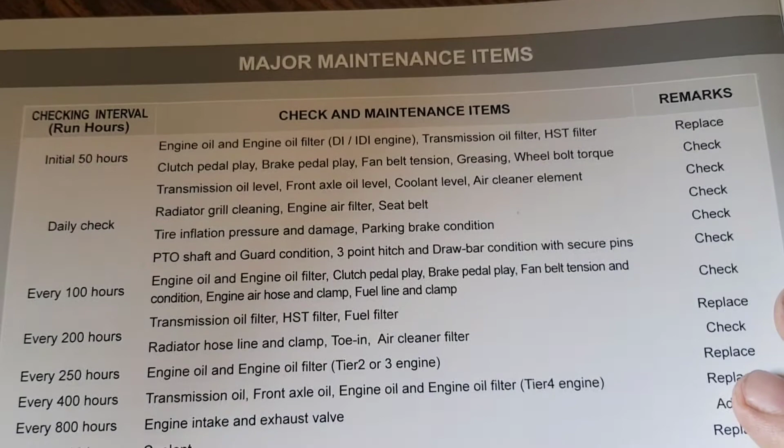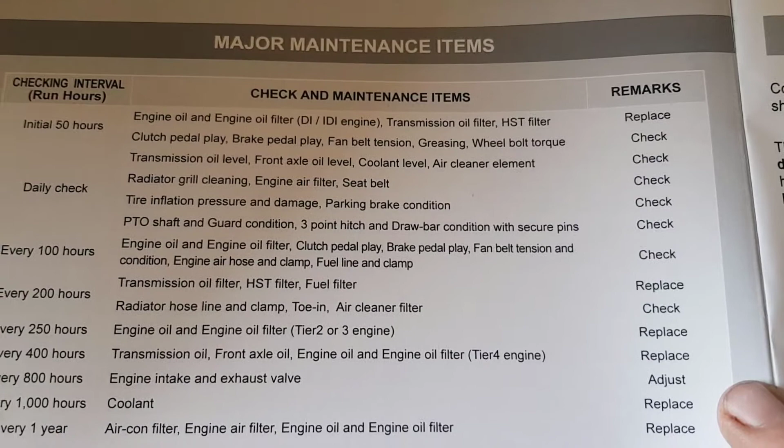Right here on the first page of the manual, it shows the 50-hour service. It says to replace that top line, which includes the engine oil filter, transmission oil filter, and hydrostat filter. The rest is just inspection and checking.

So I'm going to jump to page 2-3. It talks about fluids and grease points, and right here shows what you can use for oil. I'm going to go ahead and use the 15W40.

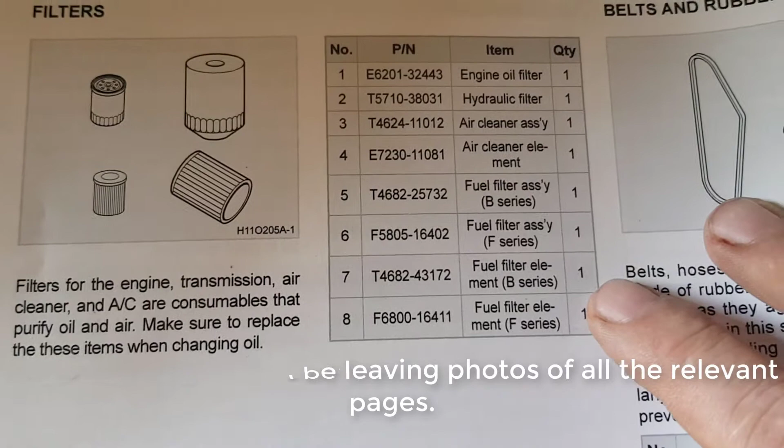I had some issues here with the filters, so I wanted to talk about it. Some of them I couldn't find, so I went ahead and ordered a kit. I'll put the link down in the description - I got it on Amazon.

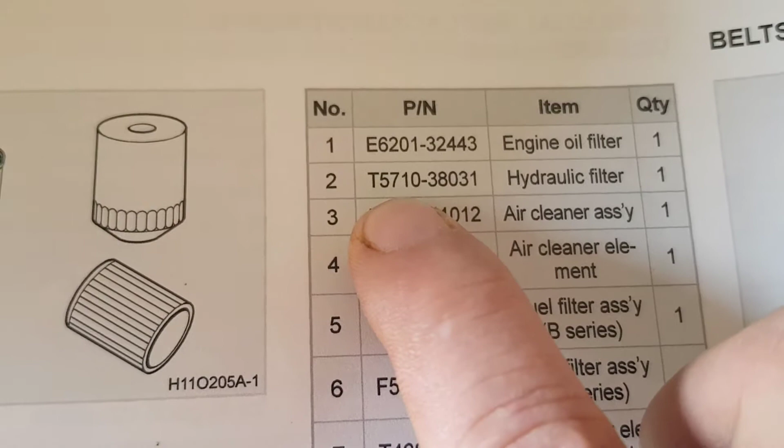Right here's the oil filter - that number lined up, didn't have any issues finding that. But when I got to the hydraulic filter, this is the number shown here, and it's the only number I could find online for this tractor. So I'm hoping this is going to be it. In the book, this is the number it shows, so it's quite a bit off - the first set of digits are wrong, but the second set is correct.

And then for the hydrostat, it doesn't even show a set of numbers here for it. So I'm just hoping that this is the right one.

I'm not going to change the air filter, but I am going to check it and blow it out with the air hose. I probably won't change that yet, but I'll have it on hand since it came with the kit. And that's the oil I'm going to be putting in, 15W40.

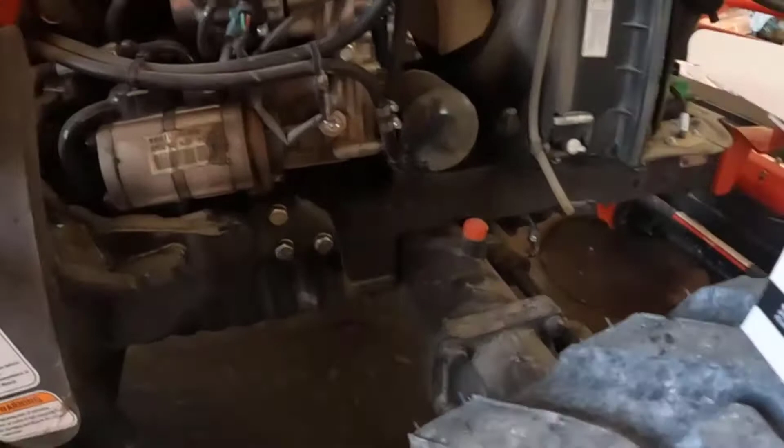So let's get in there. I'm going to start with changing the oil and the oil filter first. I'll push this up under here. Looks like the drain plugs are right here - on this one there's two, so I'll be removing both of those.

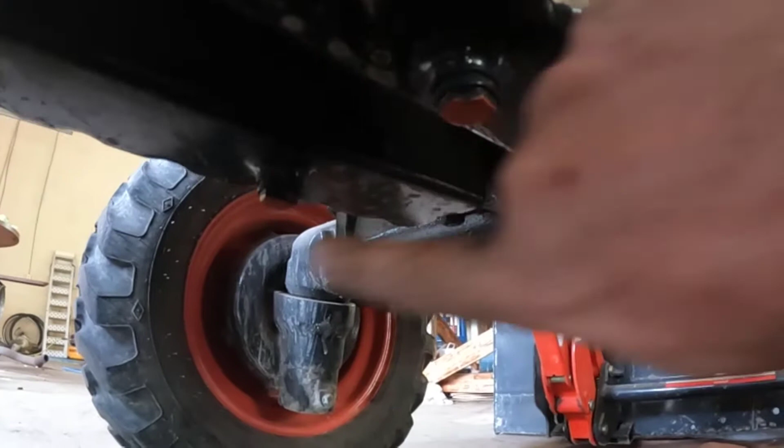Let's set you down over here. That one's loose, go ahead and loosen this one up too. That was really tight - I got that broke loose as well. I need to loosen that cap on the drain so it'll flow down in there.

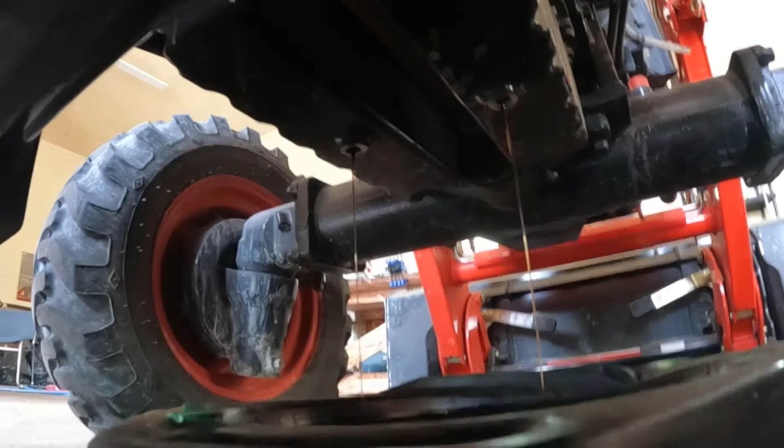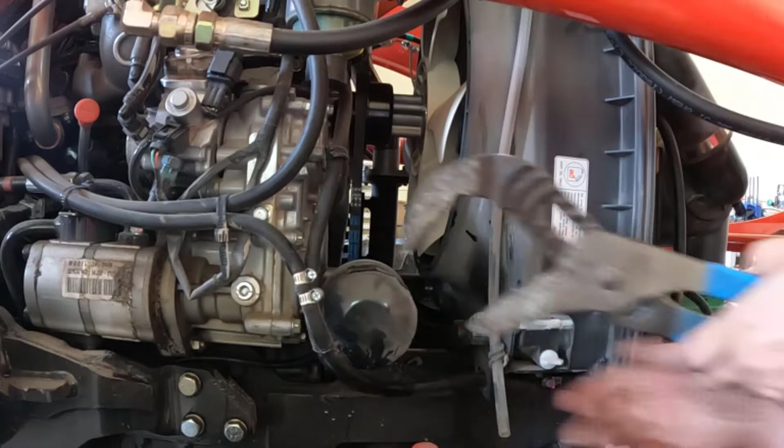I'm going to be using some large pliers to get in here and turn it. They're on there pretty tight, but the good thing is that they're old and coming off anyway, so it doesn't matter if you damage them by squeezing them or anything like that to get these things off.

I'm going to move that pan over. I don't think anything's going to come out of this one since I already have it drained. Spin it off - all right, maybe a little bit will. Spin that off of there and put that in my pan.

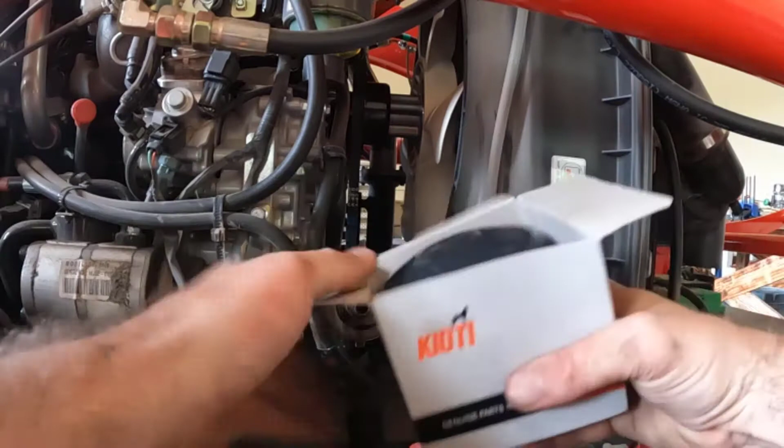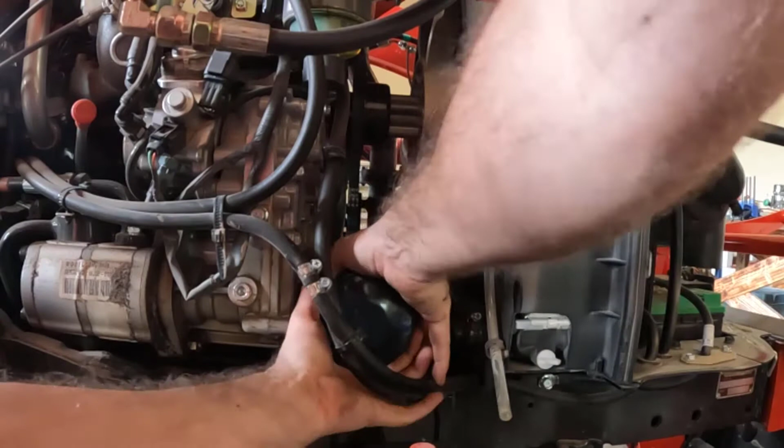Now I'm going to go ahead and remove this filter. It does have a plastic film there. You take a little bit of oil on your hand, rub it on that seal, and put that filter back on there, getting it nice and hand tight. Alright, it's good to go.

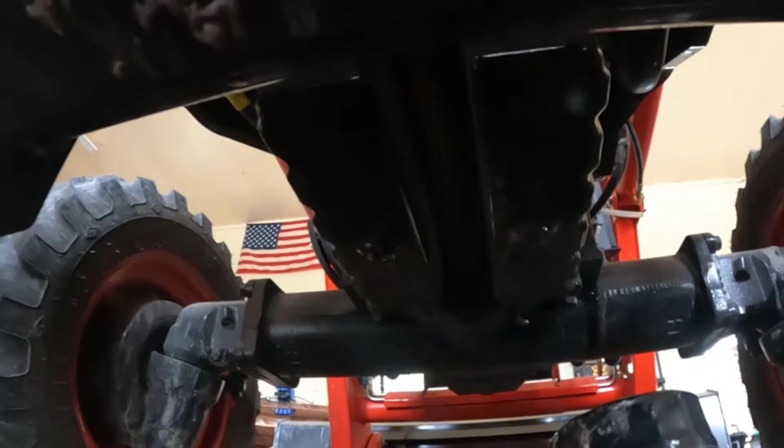I've got to put those drain plugs back in there. See, it's pretty much come to a complete stop for dripping oil. So I'm going to go ahead and insert those back in.

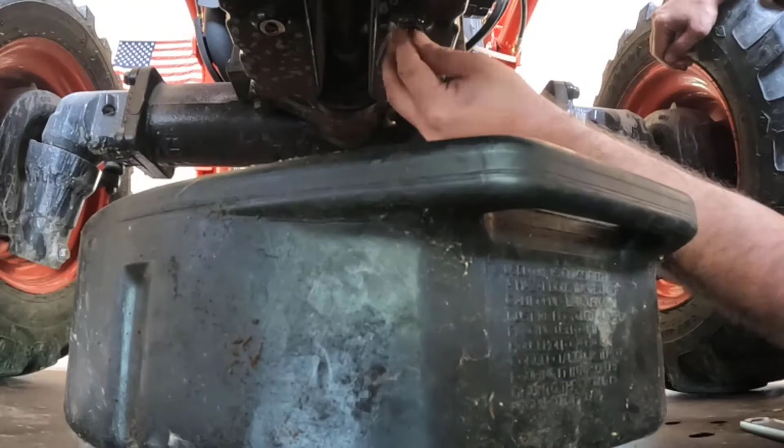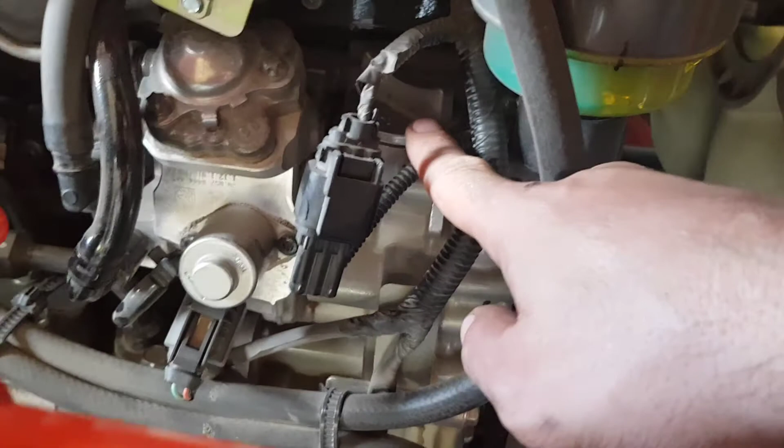Right here is the cap to put the oil in. It's kind of hidden in there - if you don't know what you're looking for, you might not see it because it's the same color, but it has a little oil symbol right there on top.

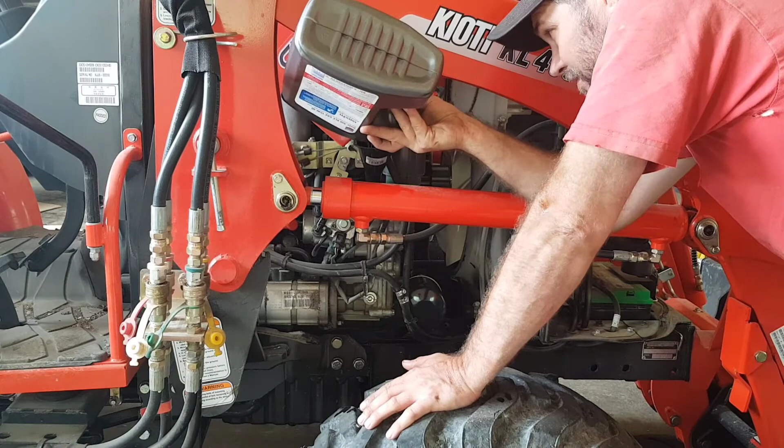Guys, I have a weenie dog down here pestering me. I think he's bored or something. He's pestering me.

On the dipstick, there's this little notch - this is the low end, so never start it if it's under that, and this is the high end over here, so don't start it if it's over that. If you go under, you need to put more in. It says it's good anywhere between here, but I'm guessing most people are getting up in this area, so that's where I'm going to fill it up to. Otherwise it's good after one.

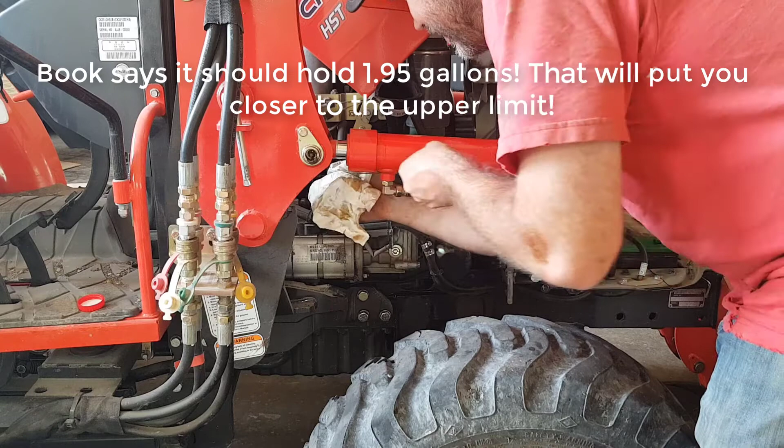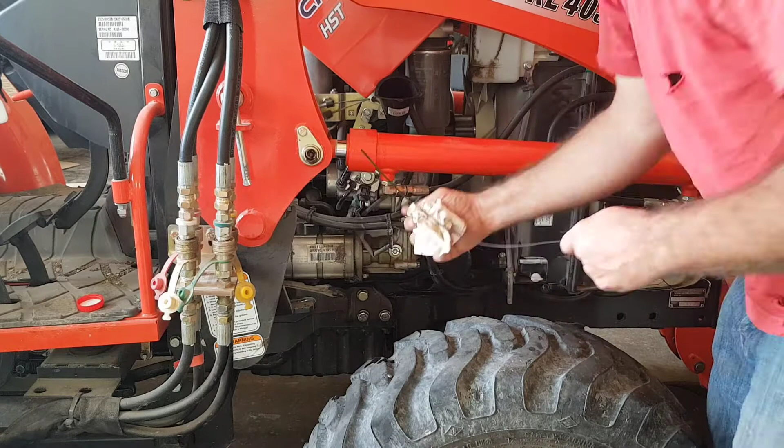Right? So I don't really get that - they don't actually say where you should be. But I'm already getting up to the upper limit, I think it's actually probably good there. I don't know, I might put a little bit more in it. I'll check it after I start it because it might suck some of that up into the engine, so I'll leave it there for now.

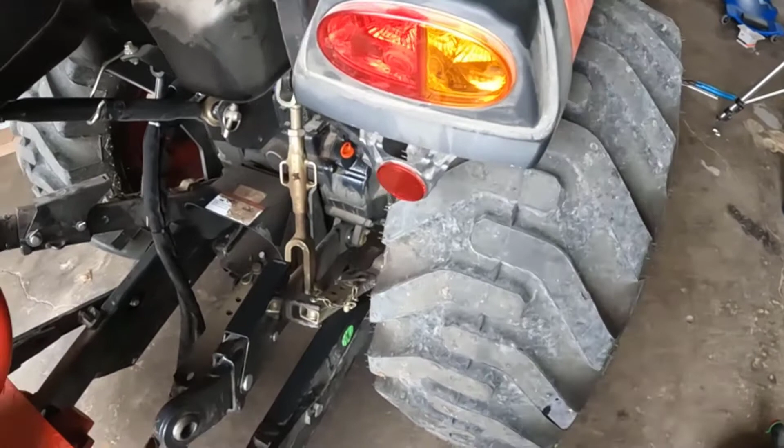Okay, engine oil's changed. So I'm going to go ahead and try to use my vacuum to create that suction everyone's talking about. Even though I'm going to change the filters as if I wasn't, because I'm going to try to do it as fast as I can, but this might help a little bit.

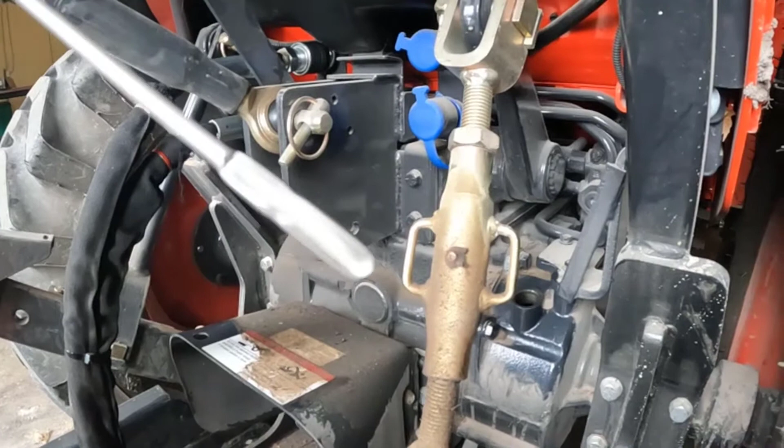I cleaned it off already because I didn't want stuff to fall in there. You can see how clean that is, you can barely see where it is on the dipstick. I'm gonna put it over here, cleaned that spot off too, set it in there. But I'm gonna have that vacuum line set there.

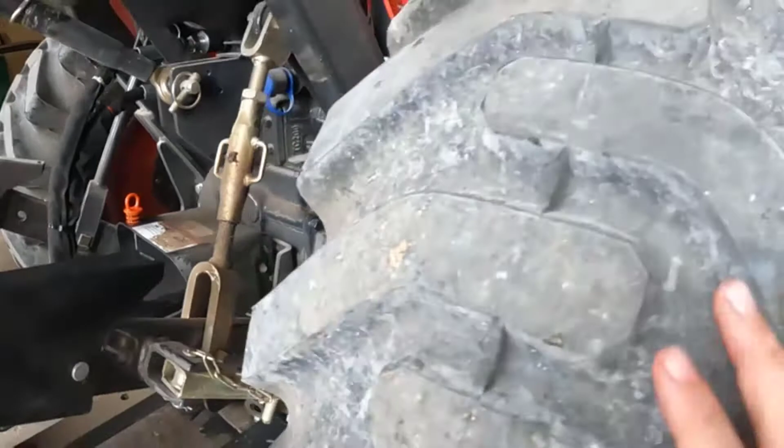Got my dad down here, he's gonna hold the vacuum in place while I'm trying to change it. So I'm just gonna have it held there like that, and hopefully that'll give it enough suction that I will have less fluid coming down. So now I'm gonna go ahead and start turning this hydrostat filter off of here.

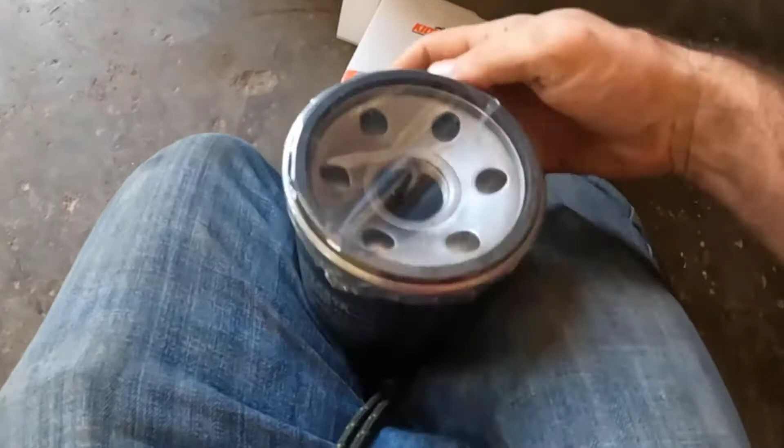When I get ready, I'll start recording again. Alright, I'm going to pull out that filter, go ahead and take this plastic off the end. I used a little bit of oil from something else on my fingers, and go ahead and get that coating on there.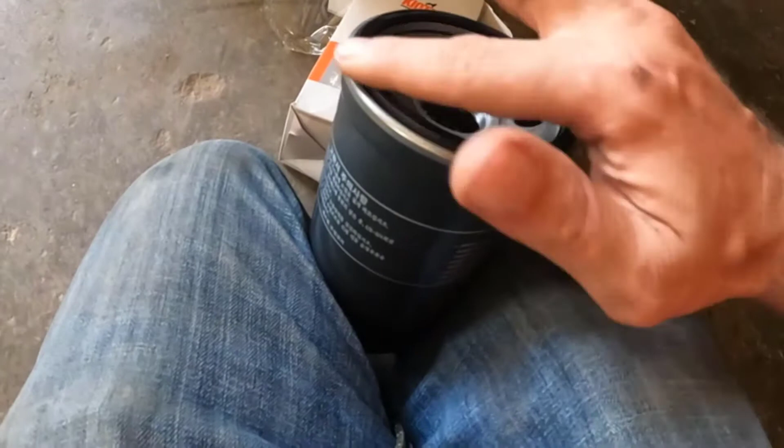And I think we're ready to start that vacuum up. Yep, get under here.

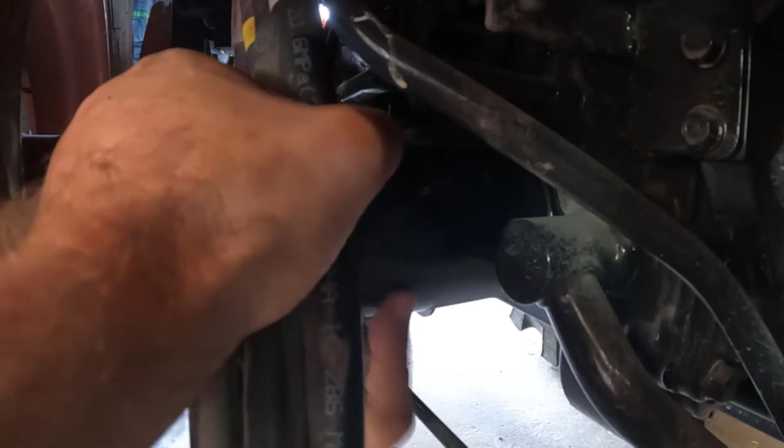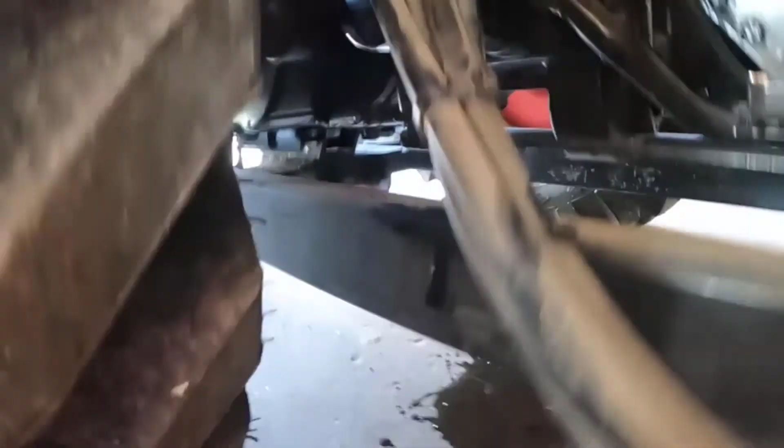Suction right now, so I believe it is working. Not as good though. You can go ahead and turn that vacuum off. So I think it still did pretty good, I could hear it suction some, but it did feel like there was still quite a bit of oil that came out. So that's the little bit of mess that I had.

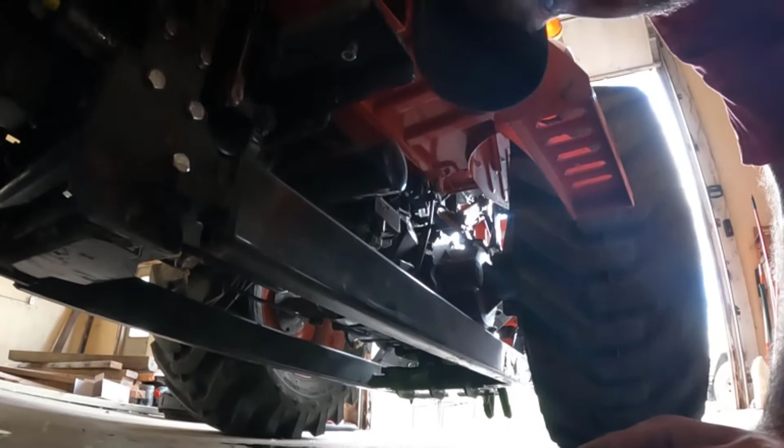So now I'm going to move to the other side and do the same thing. Underneath your step is right here is your hydrostat filter. So we're going to do it the same way. Put you down over here. This, we're going to do the same thing.

Take off that plastic seal. Go ahead and take some old oil, dab that up and get that seal wet.

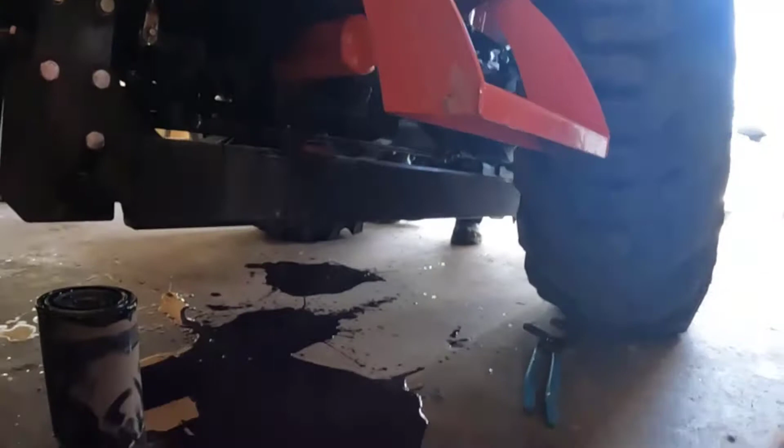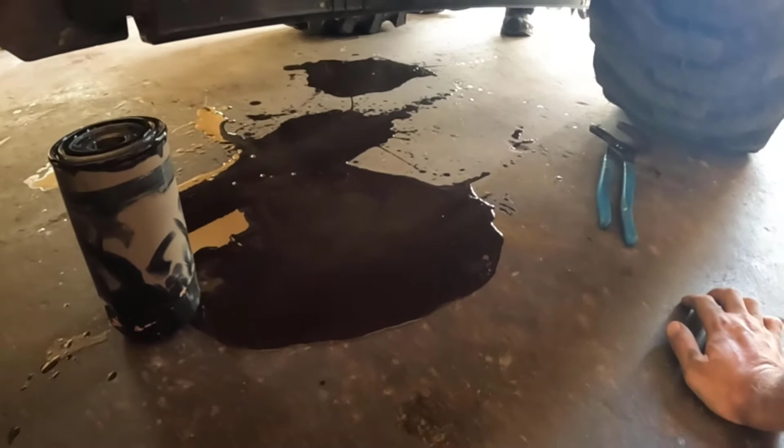We're good, Dad. Alright, I lost a little bit more on this side, but no big deal. I'll put some sawdust on there and clean that up, but I don't think I lost too much, maybe a quarter of a quart. So we're probably gonna have a half a quart to a quart once those filters fill up, that's what I'll be putting back in there.

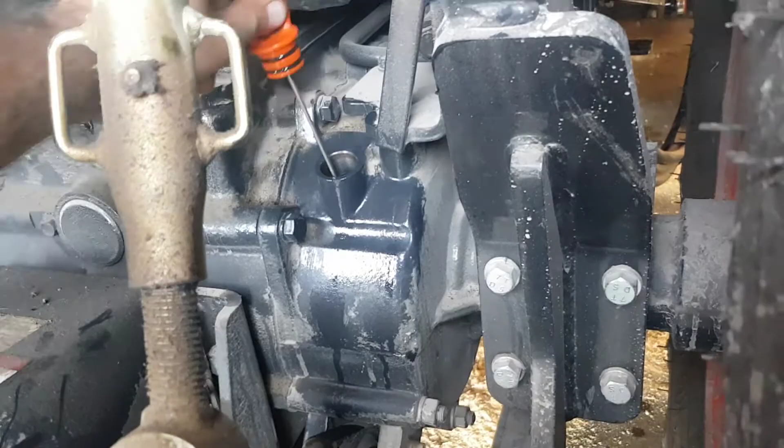Yeah, see, it's still too clear. It's still up in the upper limit, so we're good on it, but that's still pretty clear. So, all right, now we got the oil changed and all the filters done.

So that's the main part of the service, but I'm gonna go ahead and do some other stuff. Like, for example, my screen in here is dirty, so I'm gonna get that pulled out of here and blown off. I'm also gonna blow that air filter out, and I already greased most of my points not too long ago, but I may go ahead and re-grease some other points. And I haven't had any problems with any of my pedal linkage or any of that stuff, so we'll see if I look at that.

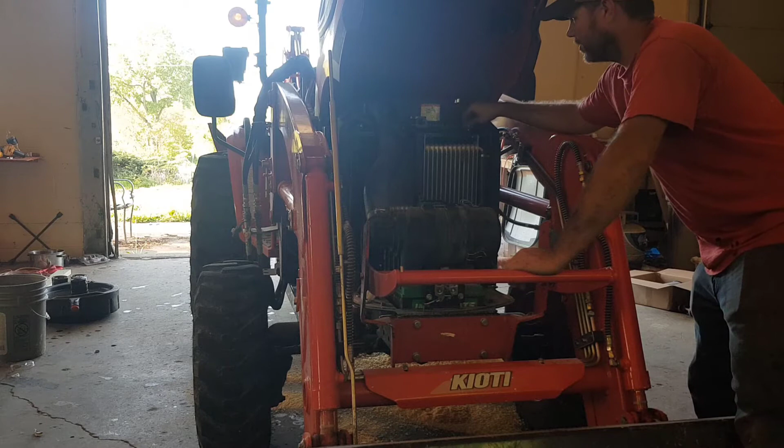These things come out with these little screws here. Yeah, look at that, nice. Got this little nice little. I might not even have to blow that, I might just come out like that. Looks like dandelion stuff, even though I don't think I've went through any dandelion pads.